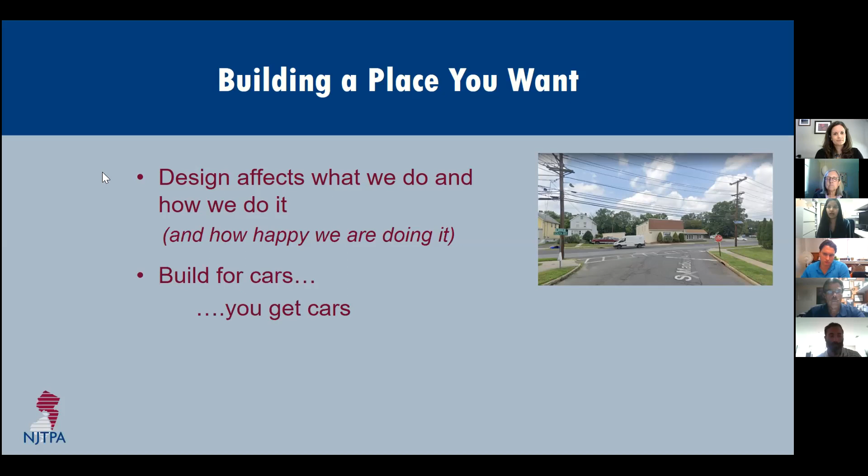And this is how, if you build for cars, you get cars. And if you build for people, you get people. Let's think about a behavior we're all familiar with: speeding. Why do people do it? Because they can, because the wider streets and wider lanes tell people that it is okay and safe to speed.

If you want drivers to slow down, you usually need more than just a speed limit. You should take the speed limit into account in the planning and design of a road. Later in this presentation, we'll cover some concepts that will show you how to slow drivers down.

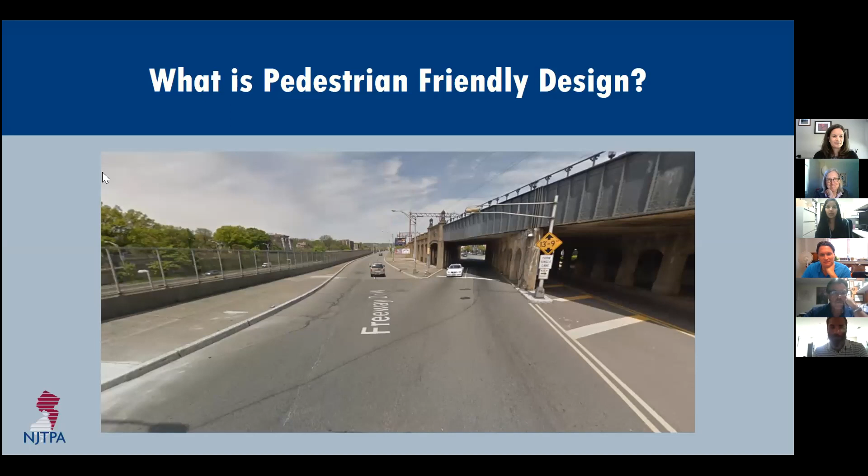Since this is a walkability workshop, let's focus on pedestrian-friendly design that covers how you get people to walk places. But before we do that, let's look at what pedestrian-friendly design is not. Does anyone here want to take a stroll down this street, go for an evening walk, or a morning jog? Probably not.

For pedestrian-friendly design, think of places where you do enjoy walking. What do they offer? They offer interesting things to look at, plenty of space to walk, spaces to sit, shade, and in many cases natural beauty and interesting architecture. These places engage all of your senses. They smell great, they are safe, and they have interesting activities going on that pique your curiosity. They get you to look up from your phones.

Design also affects our perception of distance. What is too far to walk? A quarter mile? A half mile? Did anyone here go shopping on Black Friday or a busy shopping day and have to park at the far end of the mall? Didn't that walk feel horribly long?

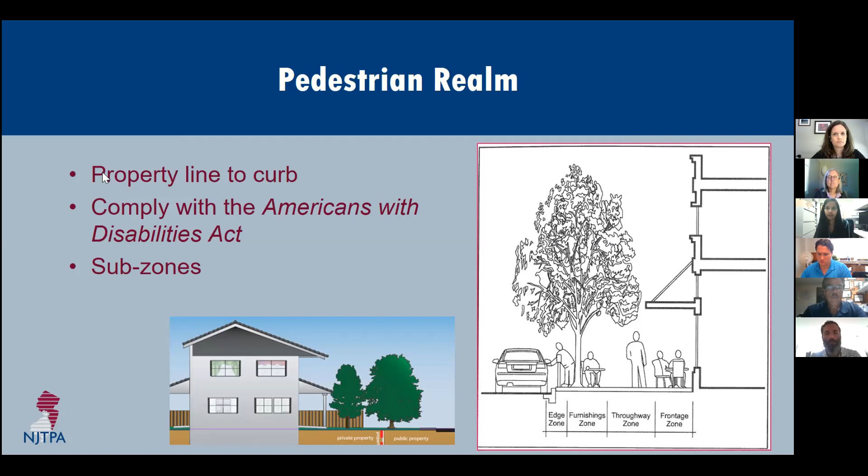As discussed earlier, walking can be made more comfortable by thinking about pedestrian amenities, which depend on context, but the more comfortable it is to walk, the more likely people will do it. This includes being wide enough for people to walk, having shade, shelter, proper lighting, seating, and other amenities.

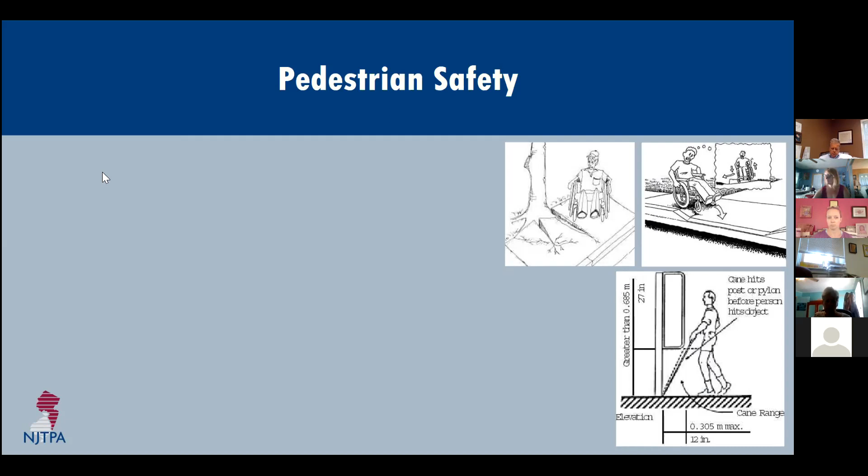Pedestrian safety: remember that a complete street is usable by everyone, including those with disabilities. The ADA, the Americans with Disabilities Act, sets rules on how to design public spaces to be accessible for everyone.

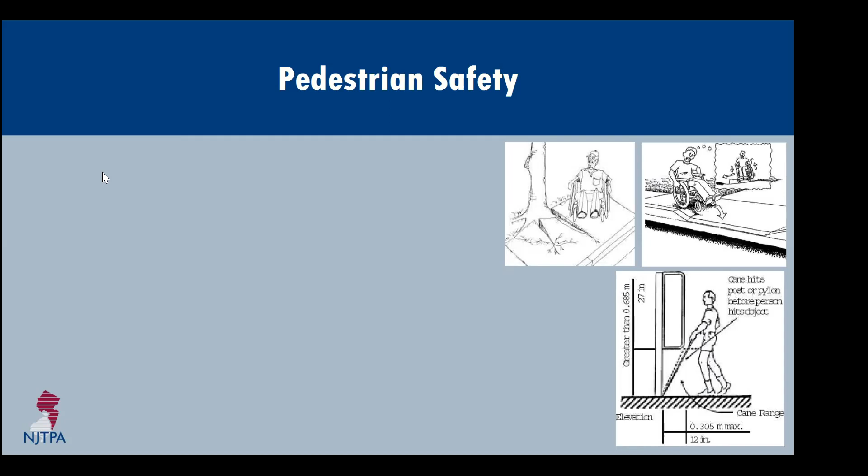Ever see people walking in the street when a sidewalk is right there? It's likely because the sidewalk has problems or is not usable for some reason. So here are some basics.

Sidewalks need to be at least 36 inches, about 3 feet, in width, but the standard usually is 5 feet. Wider is better so people can walk together, and sometimes the usable width is a little different, maybe because there's a wall next to it, or a traffic lane next to it.

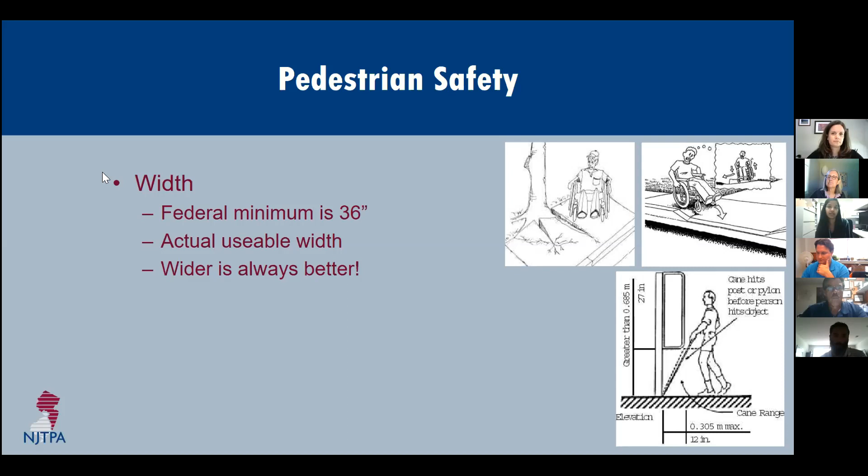As we conduct the audit, think about those in wheelchairs. Is the sidewalk wide enough for them? Is there a slope? Are there obstructions like cracks or steps that can make the sidewalk unusable for people in wheelchairs or people with strollers? Also think about how the blind navigate. Are there protruding objects which can make it hard or unsafe for them?

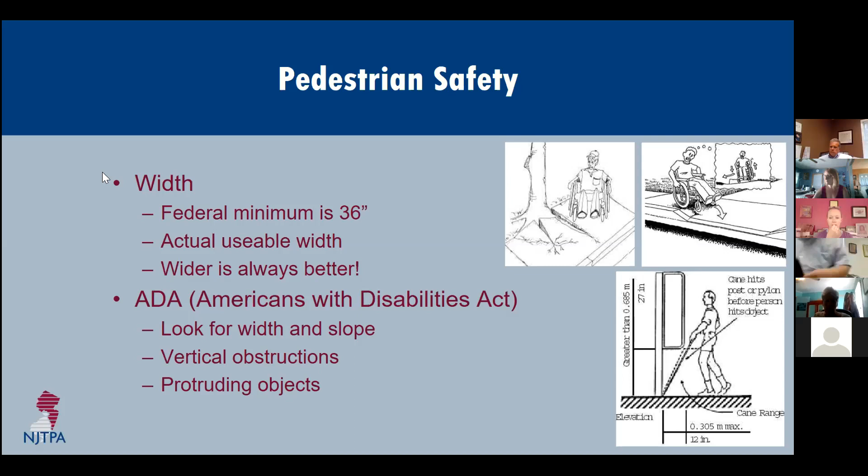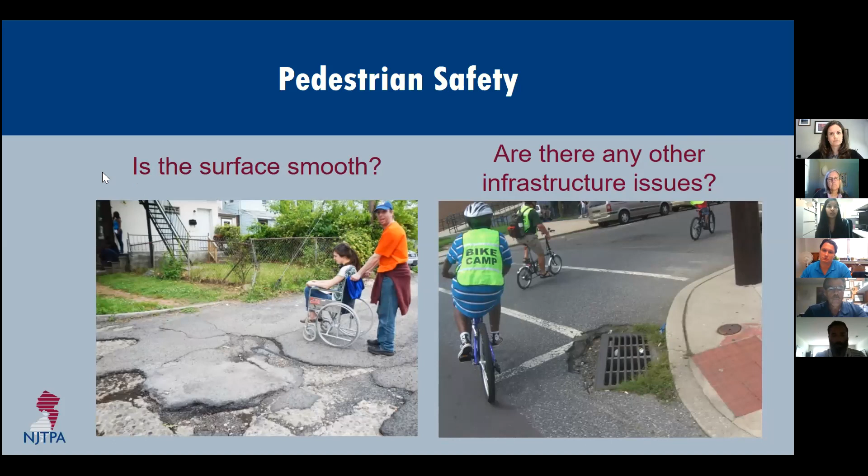Even if a sidewalk was originally built correctly, maintenance is really important in keeping its usability. It may no longer be accessible due to degraded maintenance. So we need to check if the surface is smooth, and look for any other issues. During the walk audit, we need all similar problems to be recorded.

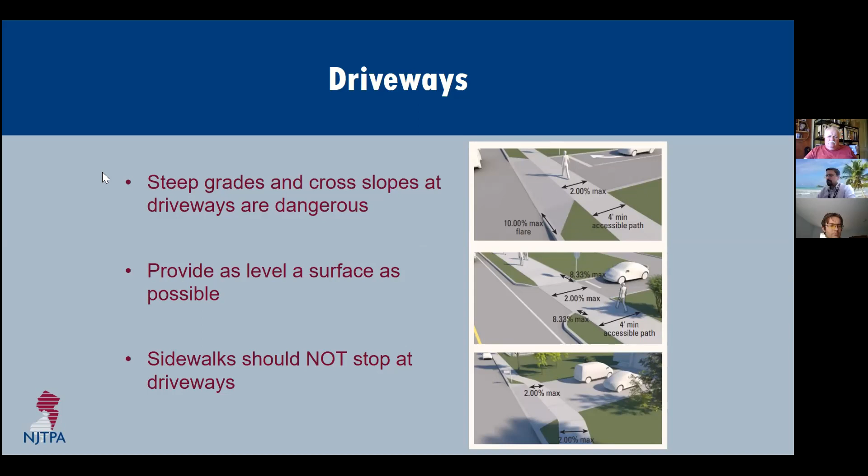Steep grades and cross slopes can be hazardous for all users, but particularly those with limited mobility. As you walk down the corridor, think about what it would feel like to walk along a slanted sidewalk with a stroller or a wheelchair. While grades are often difficult to maintain and control in all situations, every effort should be made to provide as level a surface as possible.

Severe cross slopes require wheelchair users and other pedestrians to work against gravity to maintain their balance, and can cause wheelchairs to veer towards the curb and onto the street. So it could be really dangerous.

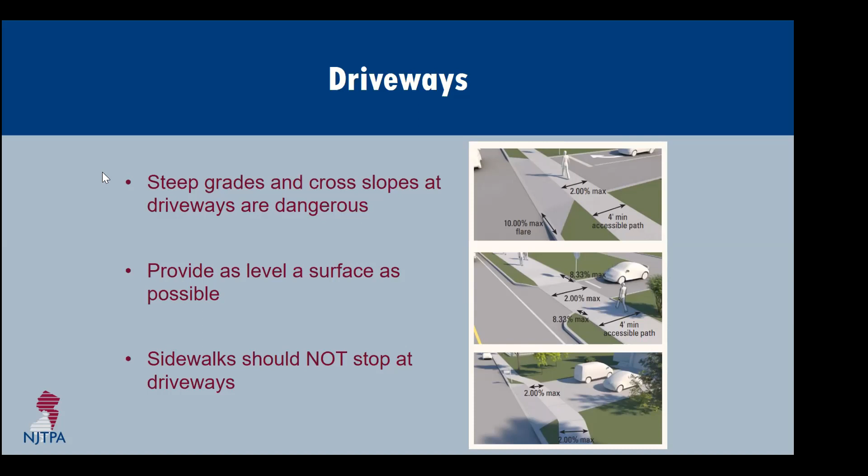Lastly, best practice is for the sidewalk to continue across the driveway, so drivers feel that they are crossing the sidewalk, and not the other way around.

Every intersection can present a serious challenge for the disabled. Are the ramps built properly, oriented the right way? Ramps should face the crosswalk, should not be too steep, and must have a smooth transition to the asphalt, and must have truncated domes. Those yellow bumpy things let blind people know that they're about to exit the sidewalk and enter the street.

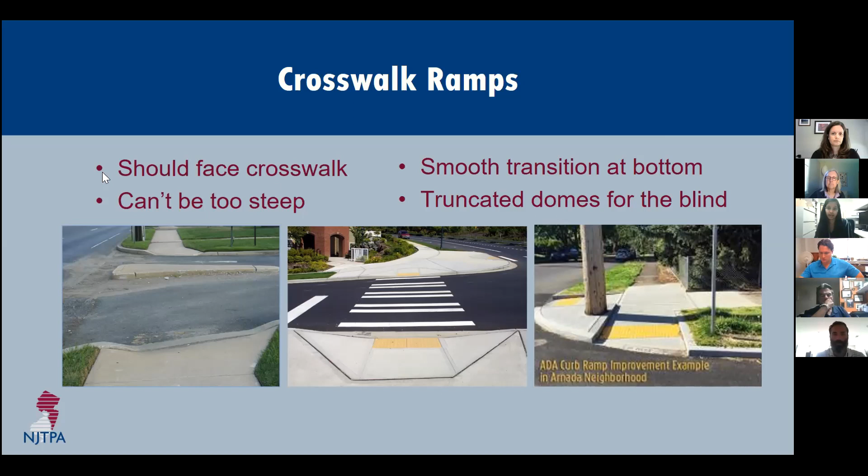Intersections can be dangerous places, and the safety and visibility of pedestrians crossing it is really crucial. One quick and low-cost way to increase the visibility of pedestrians is to upgrade the crosswalk striping.

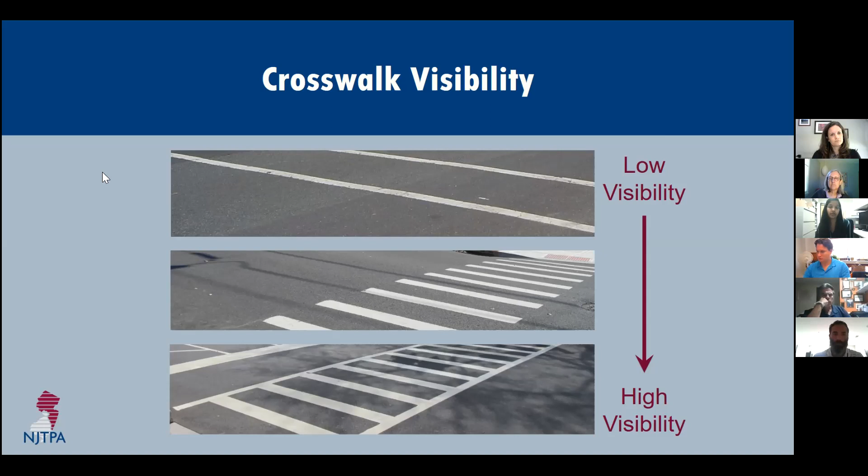The top image here depicts a standard crosswalk, the middle one is continental, and the last one is ladder. The only difference between them is the quantity of paint, and the more paint, the higher the visibility. However, note that the ladder crosswalk may trap water, and that could freeze.

Another way to improve safety at intersections is to build sidewalk extensions. They reduce vehicle speeds, decrease crossing distances, limit illegal parking near corners, and improve visibility. Sidewalk extensions should be properly designed to accommodate buses and trucks wherever appropriate.

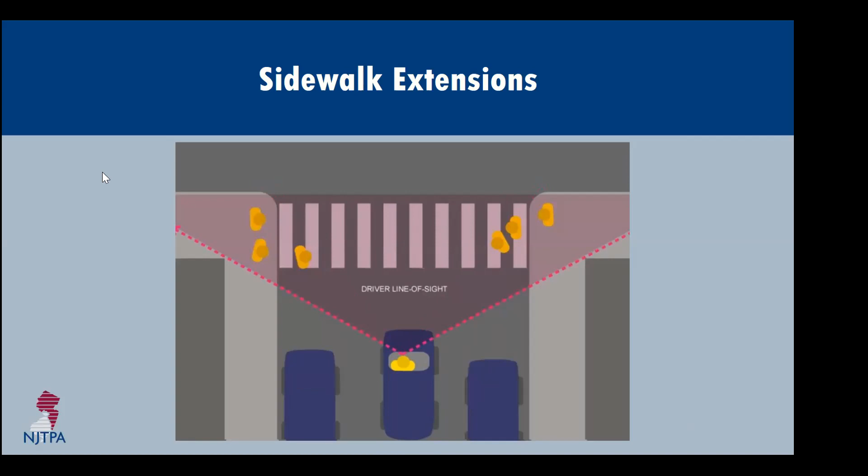This is how vehicles parking near the corners create a danger by limiting visibility for all roadway users. Look at how this car is only half a car distance away from the crosswalk, but it cannot see the people who are just about to enter the sidewalk. Similarly, the people cannot see the car, and this can create a dangerous situation. This is why limiting illegal parking near corners is really important, where sidewalk extensions can help.

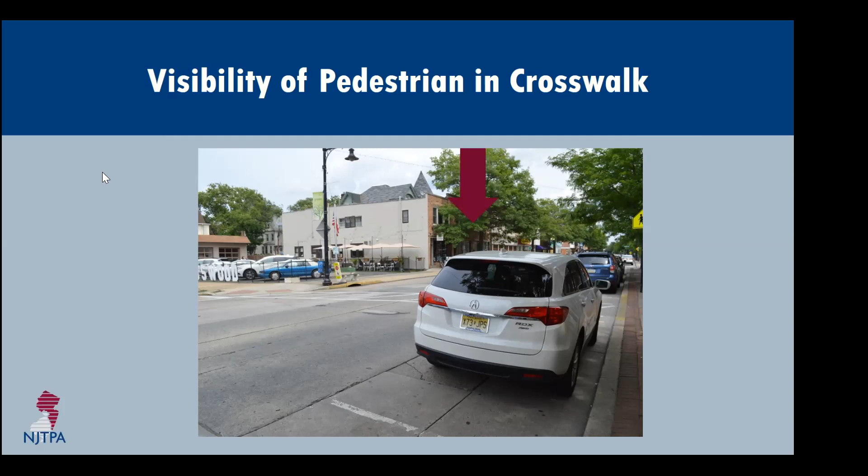Here is a real world example. Can you see that there is a pedestrian about to enter the crosswalk? Yeah, there is a person right here behind the car, kind of hiding. This is where treatments such as bike corrals, parklets, or a curb extension can ensure visibility by preventing vehicles from parking too close to the crosswalk.

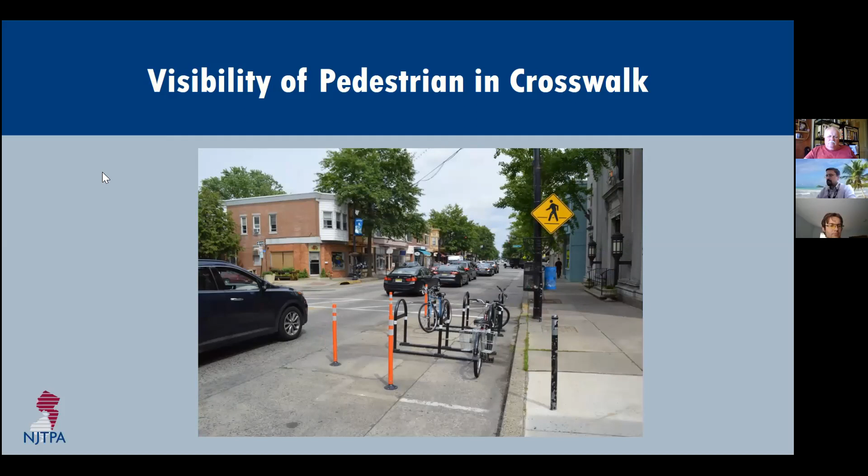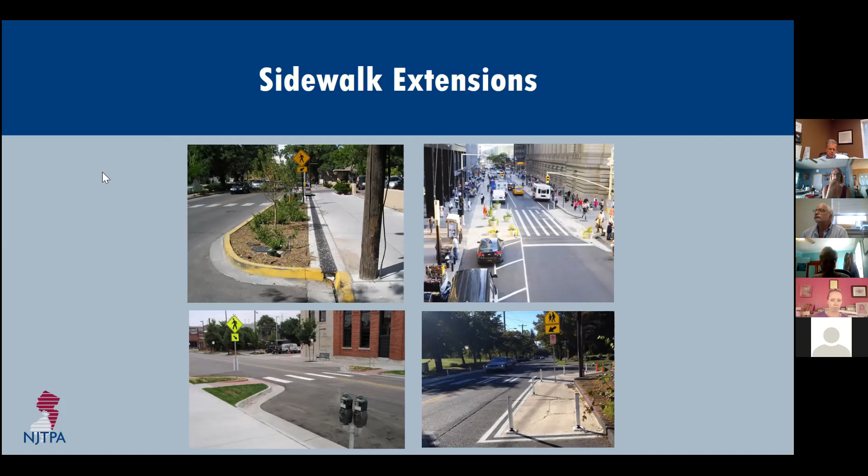You can also combine a curb extension with more expensive infrastructure like a HAWK signal, that is a high intensity activated crosswalk beacon, like this one in Westfield. The signal actually stops traffic before a pedestrian enters the street to cross it. Similarly, a diagonal crosswalk can also be an option on a busy intersection, or where you see a lot of people moving from one corner of the street to another. A leading pedestrian interval gives pedestrians the green light before cars.

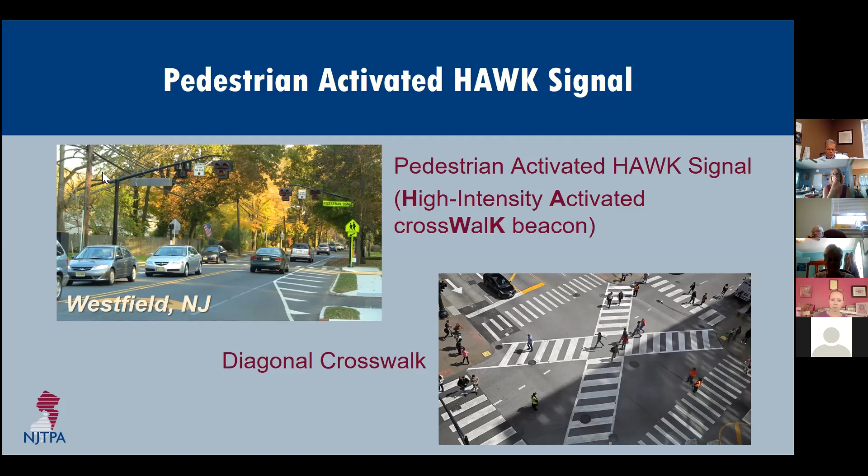Let's pause for a minute. Any questions about sidewalks and pedestrians?

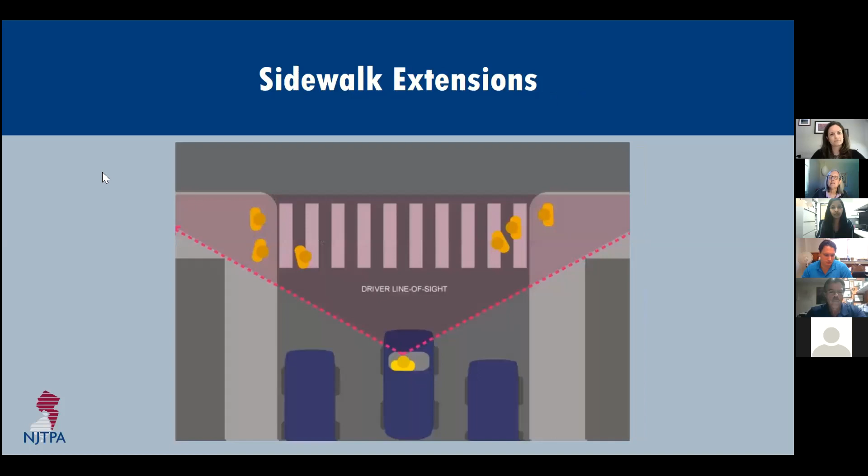I noticed James Sinclair said something about a raised crosswalk and a combination of speed bump and crosswalk. What's the stipulation for townships to implement something like that at a crosswalk? Do you need residents' approval with petitions? Do you need the county Department of Transportation to come and do a survey? But if it's a township road, can that just be something we budget for when we repave streets?

Oh, that's a good question. I am actually not sure. James, can you answer it?

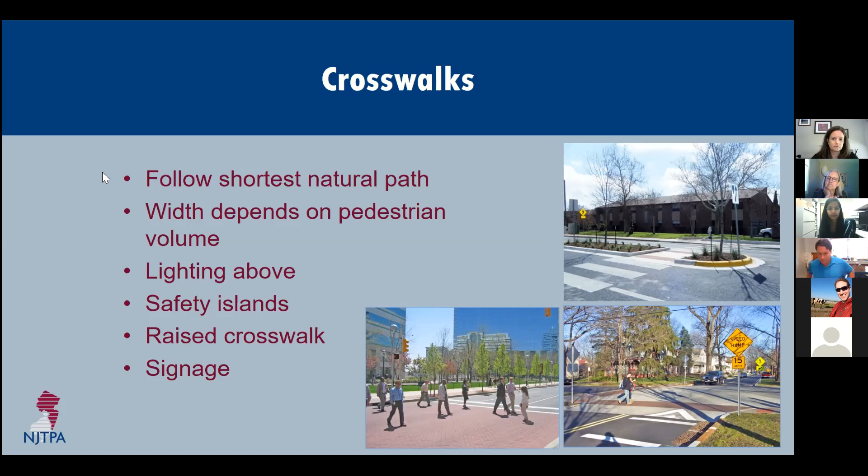Yes, so if it's on a local street, it's up to your municipality to budget for it and build it. You don't need approval. Things that do need to be taken into consideration are if buses or trucks are using that roadway, emergency vehicles, school buses, and if so, it can be designed to accommodate them. It can't be too steep. You also need to take into account drainage issues with raised crosswalks and speed bumps, and that can sometimes be one of the most expensive aspects of installing it. But there's ways around dealing with the drainage and all that. It's just some engineering involved.

Am I still on mute? We can hear you. Okay, this is Bill Neary.

One of the other concerns you have on your residential streets is maybe the people who live by those intersections are not going to be happy about hearing a ba-dum all night long either. So make sure the neighborhood understands what the changes will be in terms of the noise factors on that particular corner.

Yeah, I don't think that would be an issue. I've actually spoken to over 100 people in the immediate area of a few key points, and I don't think any resident of any of the streets would be in disagreement with having raised crosswalks in particular. The important thing is you've communicated to them.

That's good. Yep. And one last thing to add is also snow plowing is a concern, but that's something that can be dealt with as well, with training of the plow people and making sure they know where it is, and making sure the design is New Jersey friendly and not like a Florida design. So they can definitely be designed for snow. It just has to be taken into account.

James, is there a document that we can potentially look at to see what those requirements are as far as height that you were referring to?

Not at the very moment, but we can definitely find one and get it to you. Great, thank you. What would be the concern of diverting traffic to other streets, to people who become familiar with

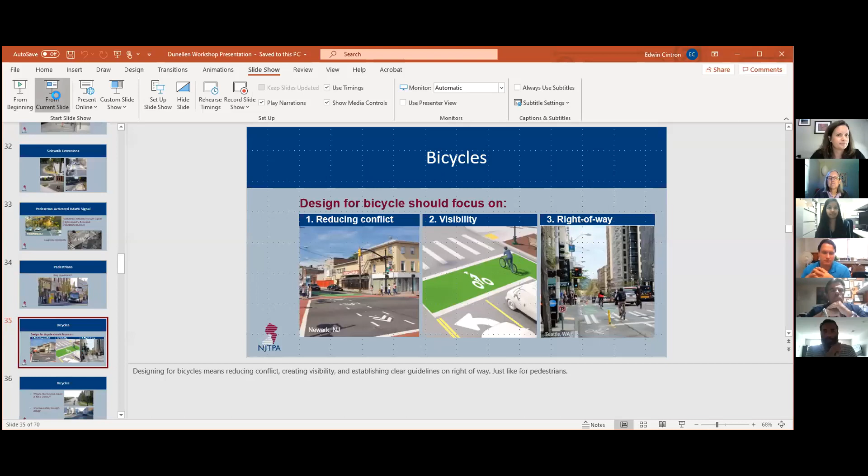All right, so this is a walk audit, but we're talking about complete streets, so we also have to think about bicyclists too. Designing for bicycles means reducing conflict, creating visibility, and establishing clear guidelines on the right of way. So this is very similar to the pedestrian improvements as well.

So does anyone here know the laws related to where bicyclists can travel in New Jersey and where they cannot go? Does anyone want to jump in and try to answer this? No? So bicyclists are allowed to ride on every roadway except for interstate highways and some state highways. Here in Dunellen, bicyclists are allowed on every road, as you don't have any highways cutting through the town. So how can we make riding a bicycle safer for people in Dunellen?

There are a lot of design options, including sharrows, bicycle boulevards, and bicycle lanes. We'll go over all of these in the coming slides.

Shared lane markings, as you see in the photo on the right here in Paterson, were proposed for shared use. I believe Dunellen has some shared lane markings on their roads in the township, but maybe not with the green square around it like this. It just signifies to the biker that this is where they're safely able to ride, and it lets the drivers know that the bicyclist is allowed to use this much of the roadway.

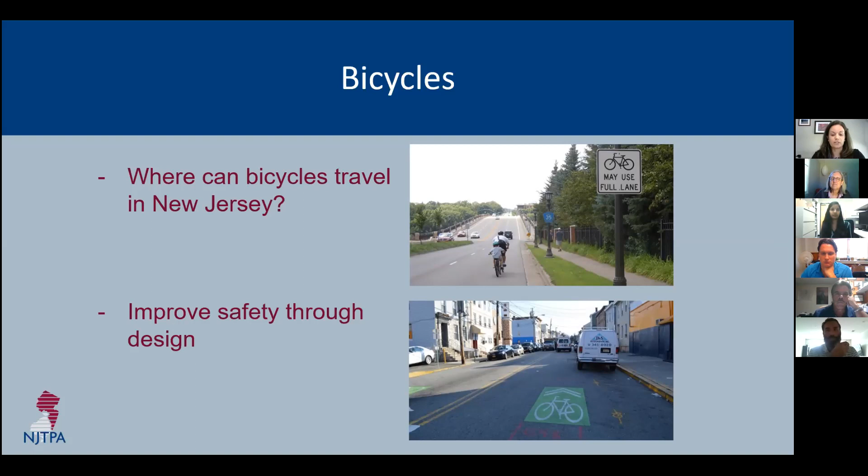A super sharrow is basically an experimental treatment that just increases the visibility of the sharrow. You can see this green version on the right here. It very clearly states to the driver and the bicyclist that this whole lane is for the bicyclist as well.

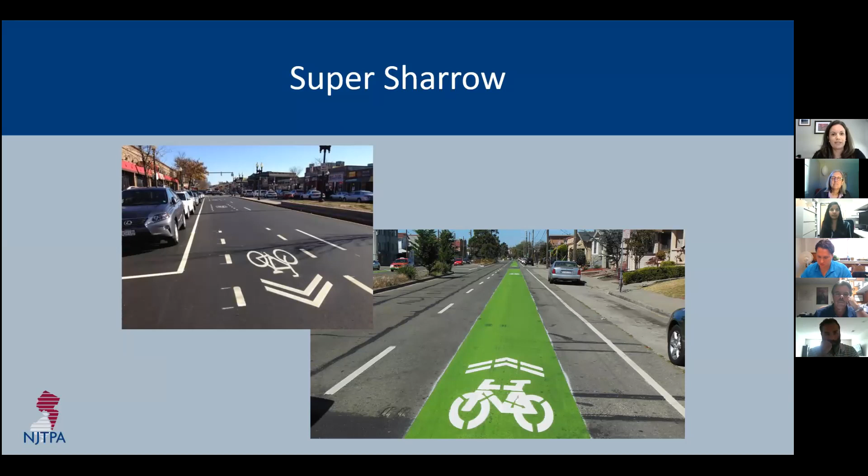Bicycle boulevards use a combination of signage and other design treatments to basically prioritize bicycle travel. These are usually better for secondary roads, slower roads with less traffic, where you want to let bicyclists cut through in this particular area. They can be a great way to create an attractive bicycle route to popular destinations, like the train station or a local elementary school, like you have in Dunellen, along the route.

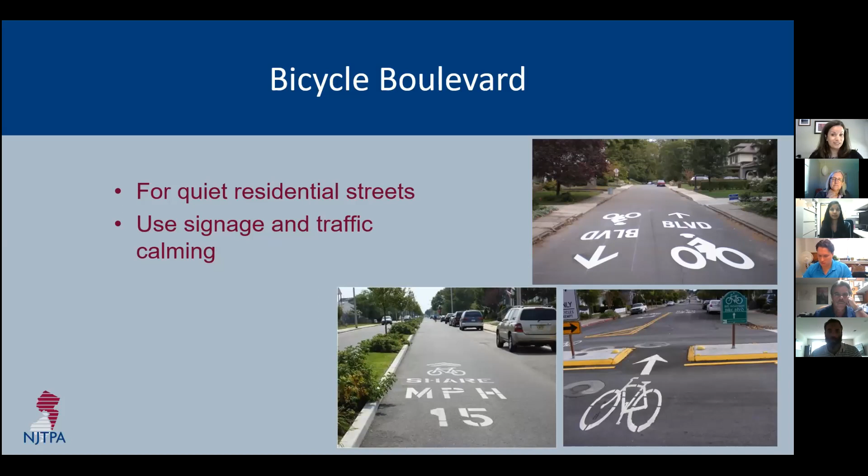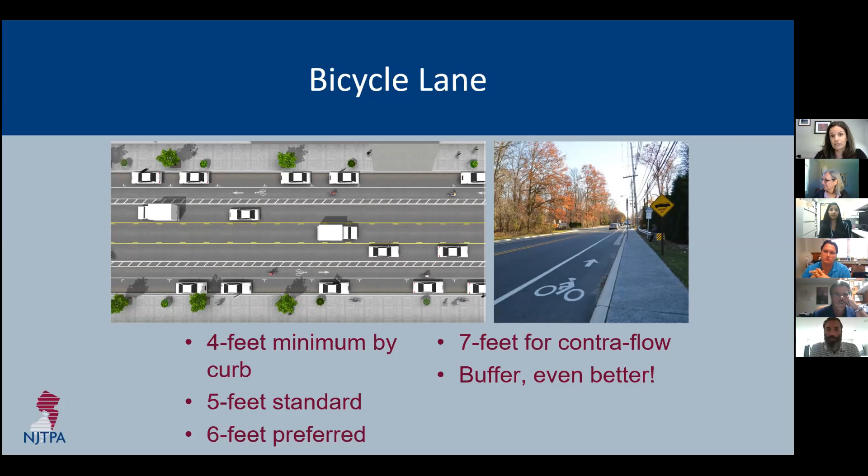A bicycle lane is a space that's designated only for bicyclists. You need at least 4 feet next to the curb, or at least 5 feet if there's street parking. The wider the bicycle lane, the more comfortable it is for more types of users. And if there's a buffer between the lane and the traffic lane, it would make it even more comfortable for more types of users, especially when you're talking about connecting bicyclists to elementary schools.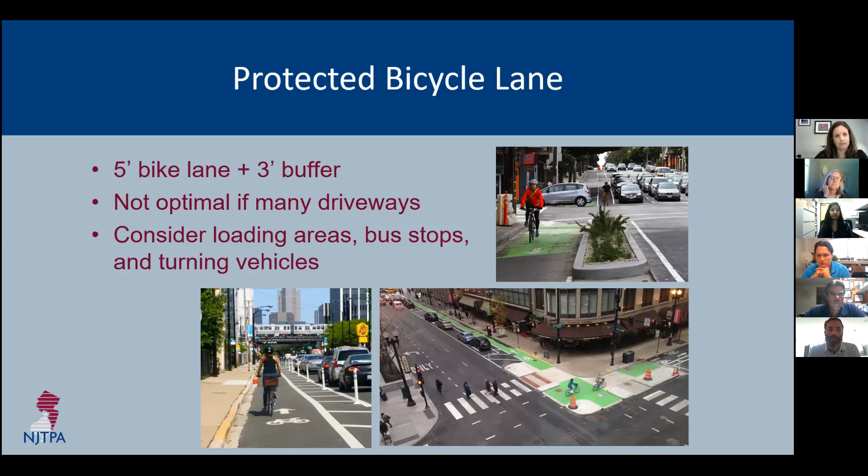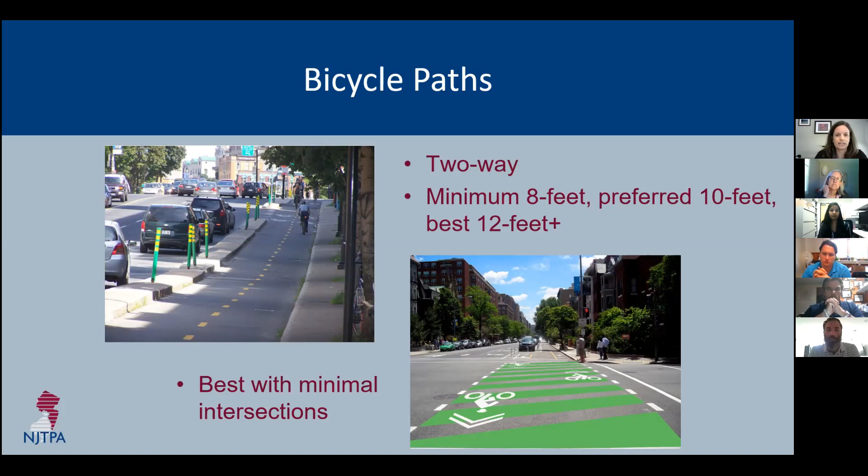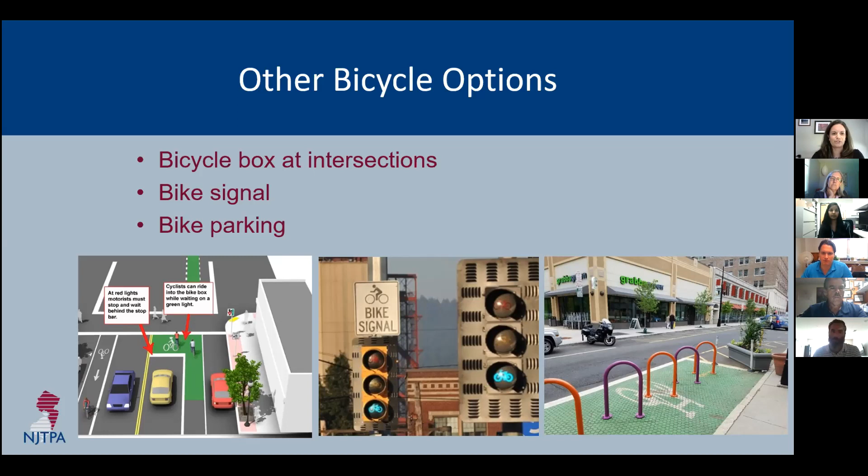Bike parking is also really important. If you want students to ride their bikes to school, they need a place to store their bike while they're at school. You can also use bicycle parking as an opportunity to create additional safety, since it increases the visibility of the crosswalk if placed just right. So you can have bicycle parking and improved pedestrian safety in an area at the same time.

So do we have any questions about some of the bicycle opportunities that are available? Lisa, do you mind if I make a statement? Oh, sure.

As part of what we're doing, because South Madison is being paved in August, part of the section that is not part of this corridor study will have striping that helps narrow the road, which slows down traffic. But part of it would be sharrows for bicycle use. The town just applied through the state NJDOT for pedestrian safety bike routes and paths throughout the town. Hopefully we do get those funds, but I just want to make a note that we did apply for bike routes throughout town.

Excellent. And we're going to go over some of the designs that we sent in later on in the presentation too, just so people can see what some of these ideas are.

And then I see in the chats that it looks like all kids walk to the school because there's no busing, correct? Or they're dropped off by parents. My very little experience in Dunellen is I saw a lot of kids just riding bicycles for fun. It seemed like a pretty active community of bicyclists, more so than other towns maybe.

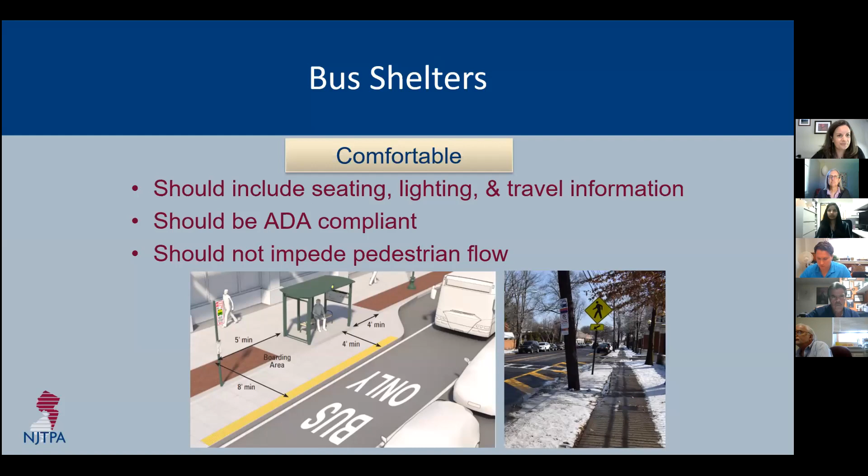In terms of buses, I'm not sure this really applies to this section of Dunellen, but there are opportunities to enhance the bus route. Marked bus lanes can provide dedicated space for buses in the street, usually distinguished by colored pavement, like the image on the left, or different textured pavement or signage. Bus lanes should be at least 11 feet wide when there's no buffer, and can be a little narrower if there is one. This is just an option for areas with high bus traffic.

So do we have any public transportation questions? I'm just checking the chats real quick. It looks like we can head right into reducing speeding.

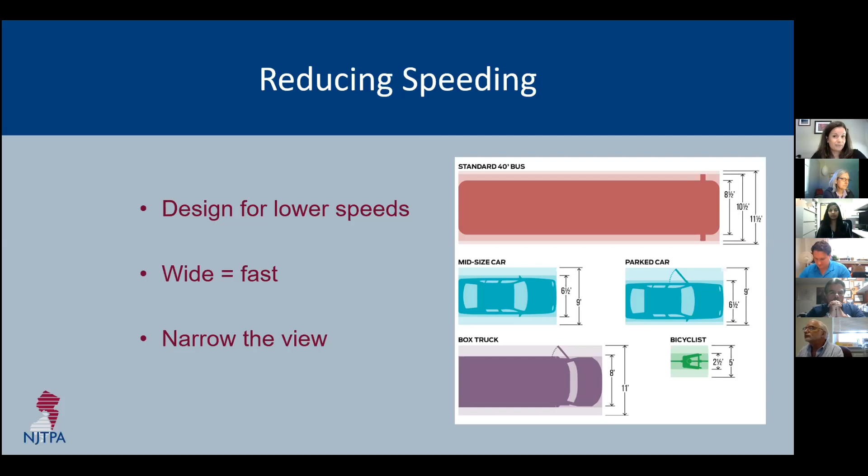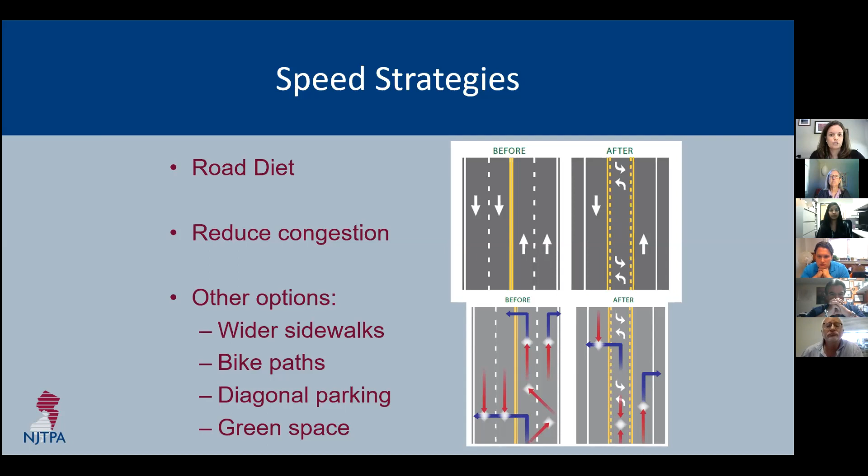Other road diets can reallocate space for parking, wider sidewalks, green space, or bicycle facilities in the extra space made available. The idea is just to ensure a roadway that's designed for all users.

So, speed bumps. When it comes to vertical speed control, speed bumps are an option. Everybody is pretty much familiar with the speed bump. As mentioned earlier, they can be really effective, but they're controversial because they can get loud, they can divert traffic to other streets, and there are some maintenance issues.

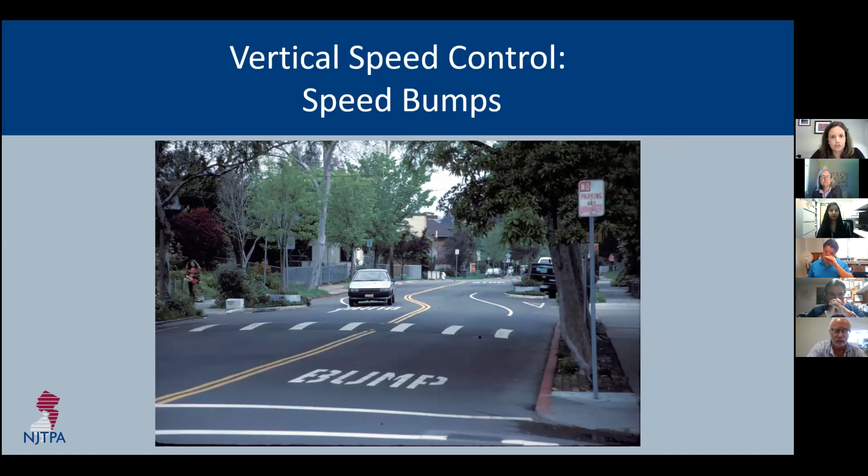Alternatively, you can use a speed cushion, a softer speed bump which allows drivers to go approximately 20 miles an hour instead of 10. It has a gap for emergency vehicles to get through so they don't have to go over the bump. Then there are raised crosswalks, basically a speed table. It's flat on top, and you can use it to build a crosswalk that's the same height as the sidewalk on either side, which is actually better for those using wheelchairs or pushing a stroller.

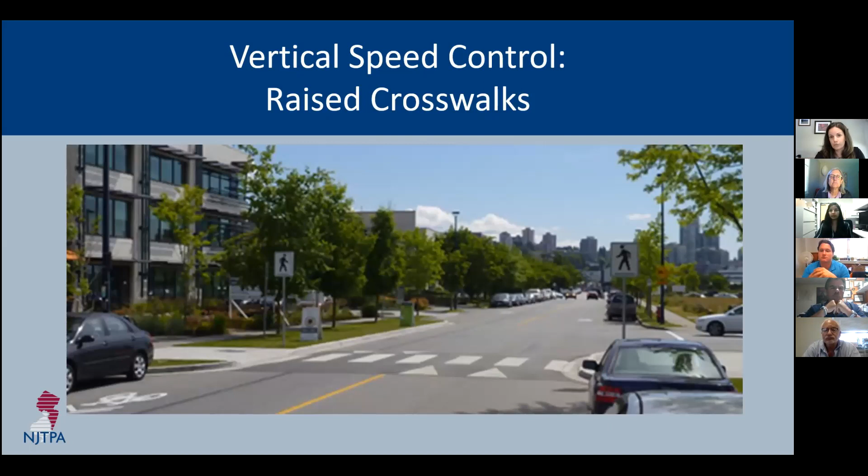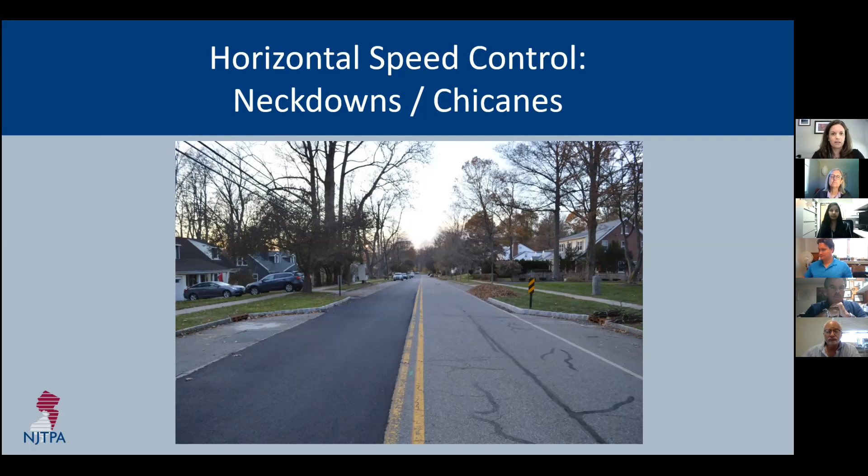In terms of horizontal speed control, you have neckdowns or chicanes, which are a series of raised or delineated curb extensions. You can see this example in Morristown, where they narrowed the road by extending the curb because they were having a speeding issue. You can see it from another angle here. It doesn't necessarily narrow the travel lane, but it narrows the road and makes the driver a little more aware of how fast they're going.

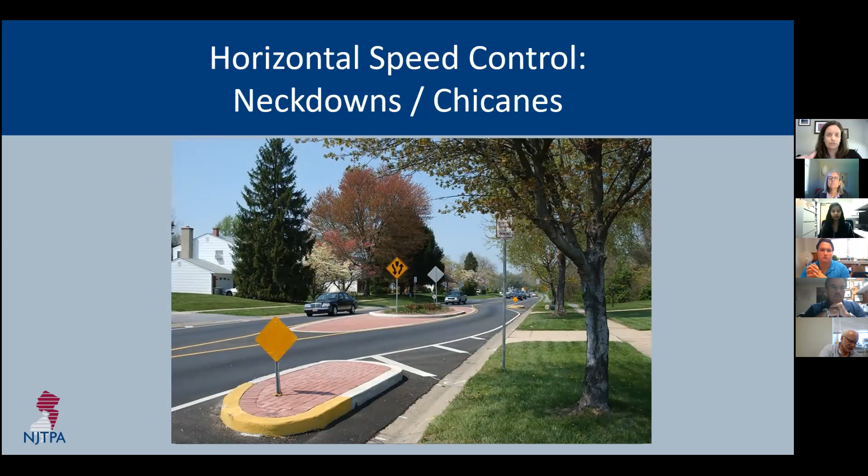Here's a more elaborate chicane, which actually makes you turn and navigate through it so you slow down a bit as you're going through. Forcing tighter turns is also another way to slow drivers down, and it also creates more pedestrian space. As the driver comes around this turn, they can't take it quite as fast as they would have if it were maybe where that original brick line was. They have to take the turn a lot slower, which gives them more opportunity to notice pedestrians entering the crosswalk.

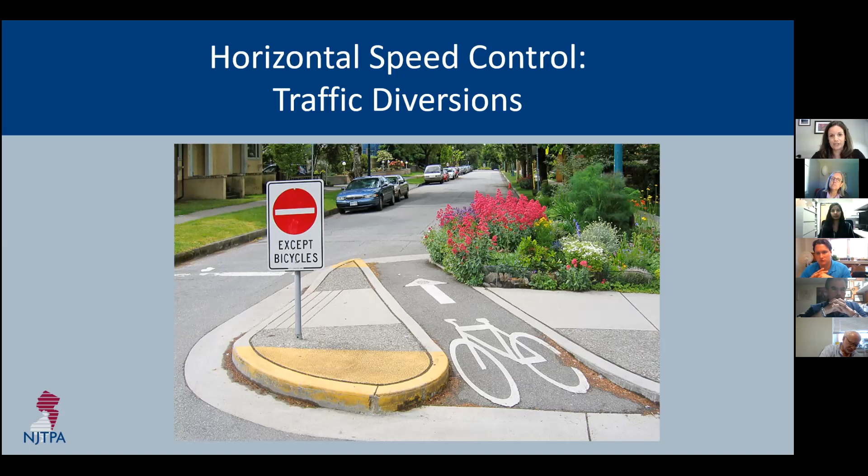As mentioned in the bicycle boulevard section, traffic diverters are also a great way to restrict a roadway to only local traffic and bicycles too. You can also notice the planting on the right here, it's a great opportunity to put in some beautiful green infrastructure. Speaking of green streets, these elements can be incorporated into a project to provide environmental benefits, reducing stormwater runoff and flooding, achieving long-term infrastructure savings, and making an area more beautiful while creating additional shade.

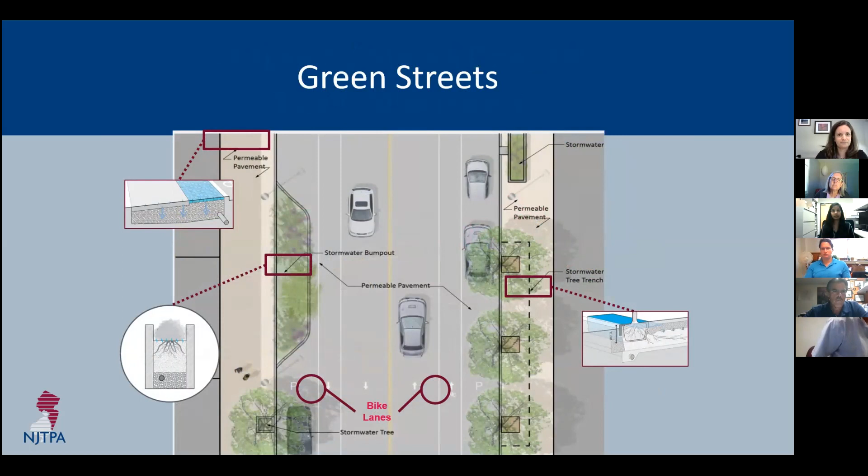So do we have any questions about speeding? Oh, and it looks like there's nothing in the Dunellen code prohibiting bicycles on sidewalks. So that's our answer for the bicyclists.

Lisa, are any of the speed bumps not good for bicyclists? If we want to encourage bicycling and we don't want them on the sidewalk, and you put a speed bump across the street, what's the best for those and what's more of a hazard for them? Right, what would be more of a hazard for a bicyclist? James, do you want to talk a little bit about the speed bumps and bicycling?

Sure. So if we talk about speed bumps, there's two types most people are familiar with. The really severe ones you find in parking lots and stuff, but for public roadways they're going to be the much flatter, smoother ones. The parking lot ones really slow people down to like 2 miles per hour, you pretty much have to stop. The ones you'd put on a public roadway slow you down to 15, 20 miles per hour. So for a bike, they're not so bad.

But Lisa also showed an example of a speed bump that had a gap in it for emergency vehicles, and of course bicyclists would likely use it as well by using the slot, like in this picture. The only challenge is someone with a cargo bike, but it's not too much of a big deal.

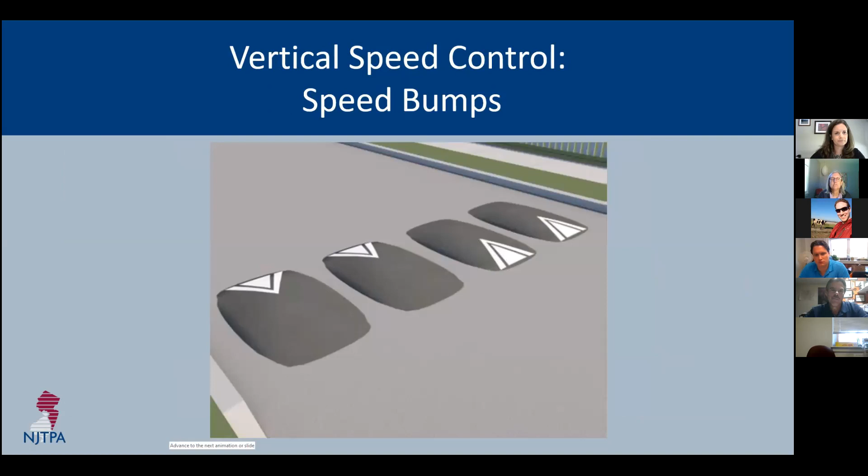Okay. Okay, any other bike questions?

Okay, so let's talk a little bit about street lighting. We're conducting this walk audit during the day, well, we're using Google Street View, which took photos during the day. So it's important to remember that day and night conditions are going to be dramatically different in certain instances. Lighting is not only a safety issue in terms of visibility, it also improves the personal security of the pedestrian as they're walking down a given roadway.

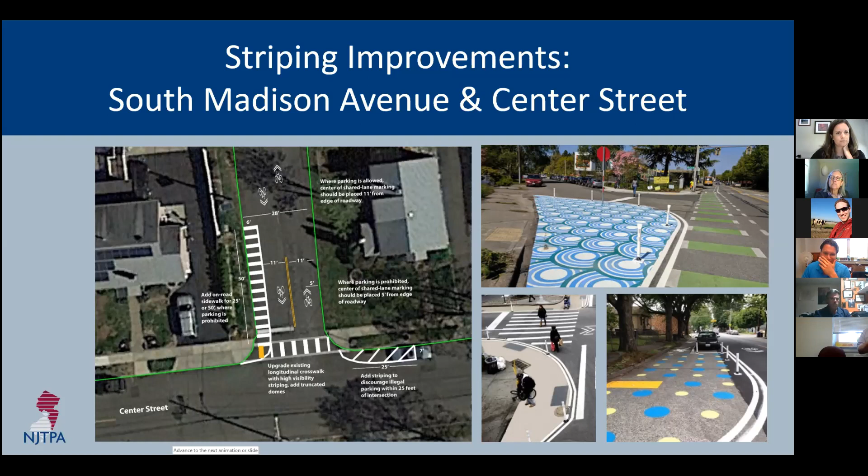Does the next slide have more pictures? Okay, yes. So moving up in the document we sent the town, we just looked at each intersection and again, looking at sort of extending those crosswalks, continuing the on-road sidewalk for a little bit longer and adding the sharrows.

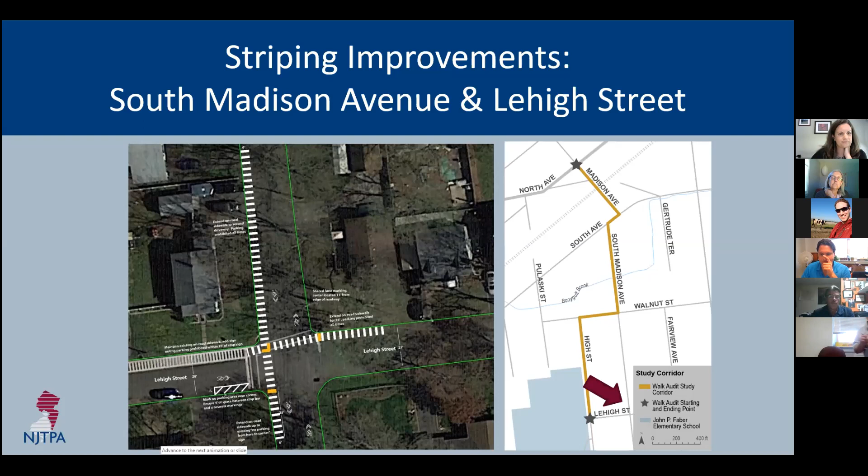And then the next one, Lisa, there's pretty much the same issue, adding those sharrows, adding the enhanced crosswalks. For that northern portion there, where there is a sidewalk, we proposed fitting in a bike lane since you're able to - I believe the road is actually a little wider up there. So you can still fit everything in and keep a bike lane in one direction.

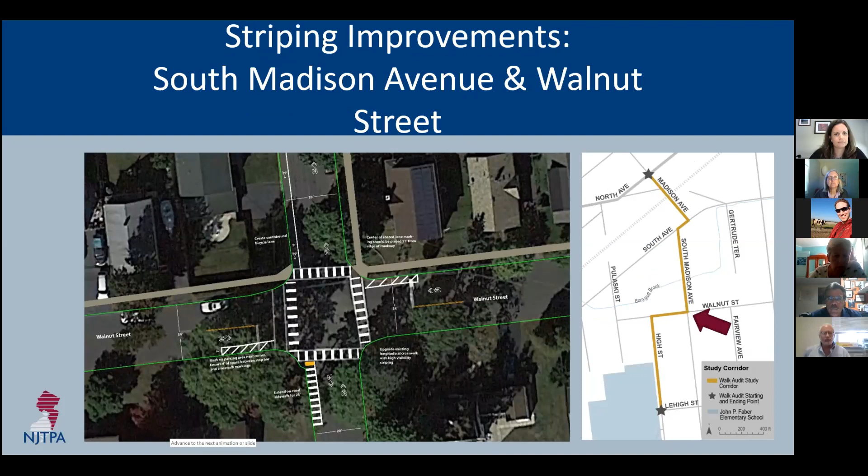So for the rest of today, since we want to focus on the corridor that's shown on the map on the right, we want to leave any questions related to the other designs at the end once we finish the corridor, just so we don't run out of time. Excellent. Keep that in mind.

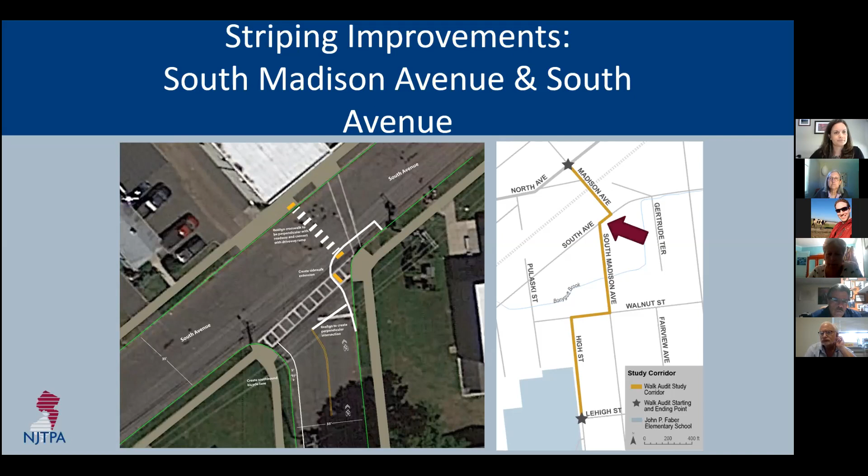It starts with section 1. It's going to ask the same questions throughout. It'll start with the design questions: how many lanes are there? Is there a median? It'll go into driver behavior, the sidewalk conditions. What is the quality of the sidewalks? Are there sloping problems? Then it'll talk about curb cuts and ramps. Are there any missing ADA ramps? How is the signage along the route?

What type of parking? So when you look at near the elementary school, you would say angled parking. Amenities - are there benches, trash cans, lighting? What are the trees like? There's some space for additional notes, and then you'll go through the exact same thing for section 2.